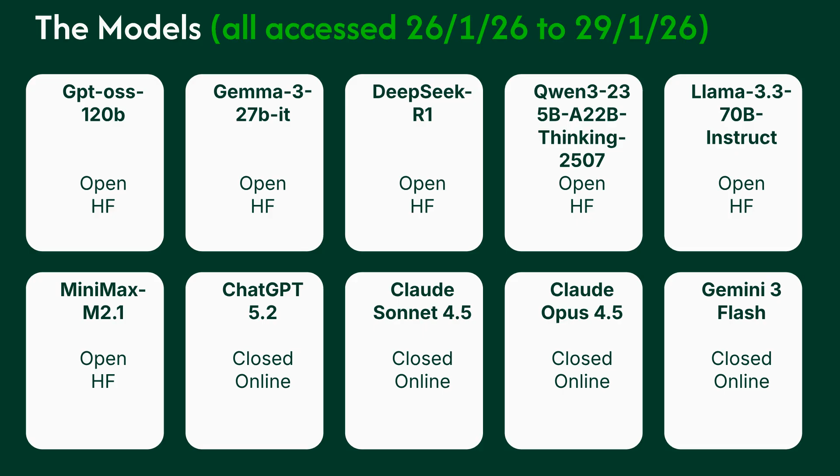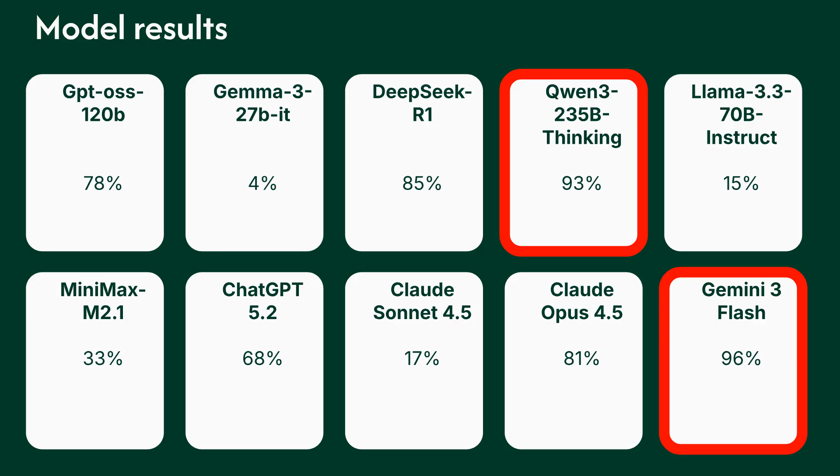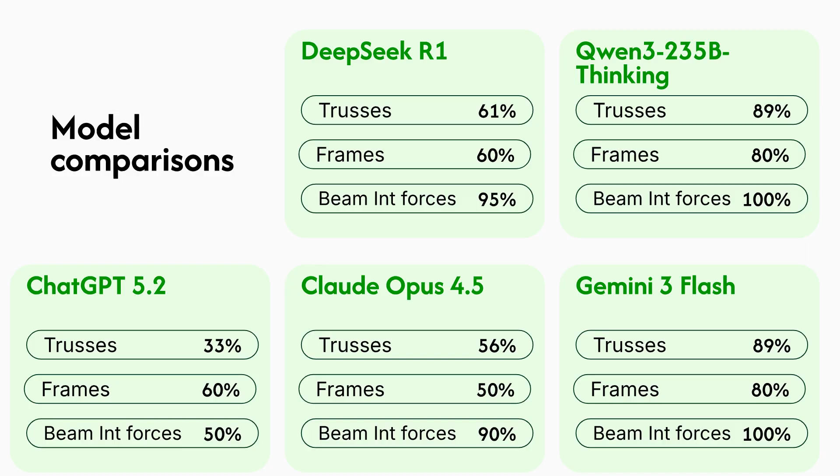Trusses, frames, and beam internal forces are the more difficult topics in engineering statics, due to the substantive calculating and reasoning required. Gemini 3 Flash and Qwen 3 Thinking performed strongly on these topics, with 80% or higher accuracy. Other models struggled in these difficult areas.

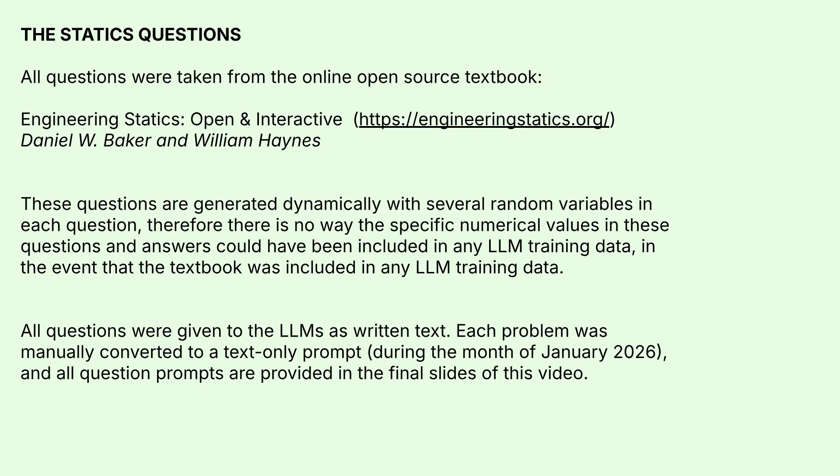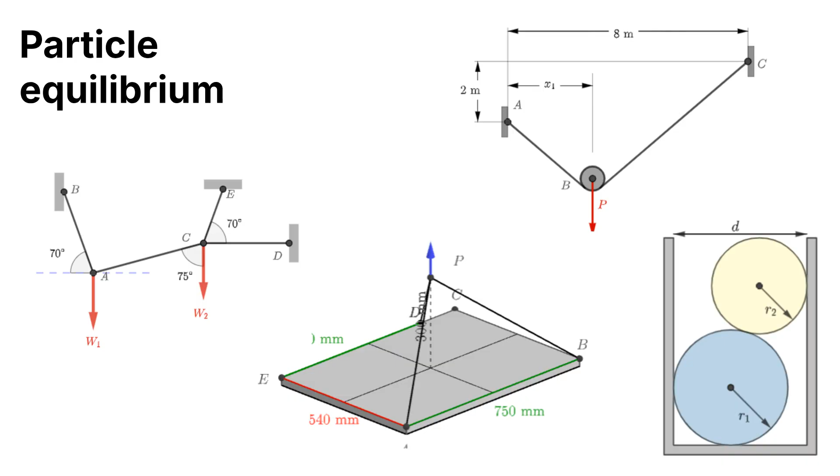All statics questions were sourced from the open-source textbook, Engineering Statics: Open and Interactive. Because the questions utilize dynamically generated variables, it is unlikely that the specific numerical values were included in any LLM training data. All questions were manually converted to text-only prompts. The following slides show some exemplar problems from the different topics. Note that the LLMs were prompted with the text-only version of the problems provided at the end of this video.

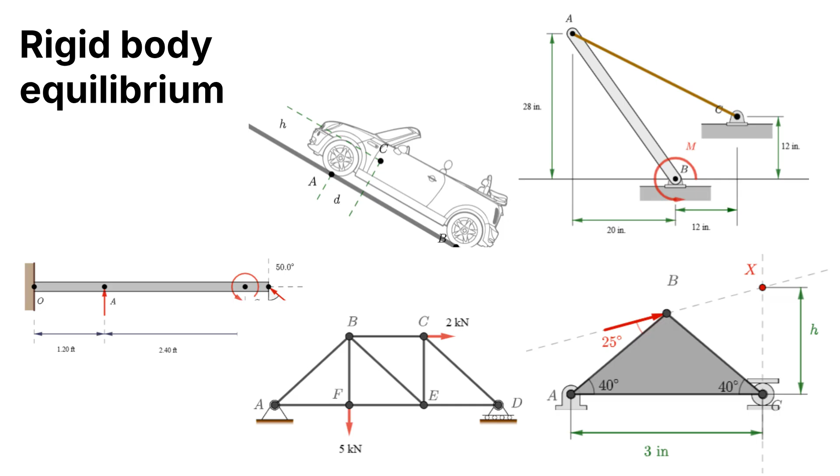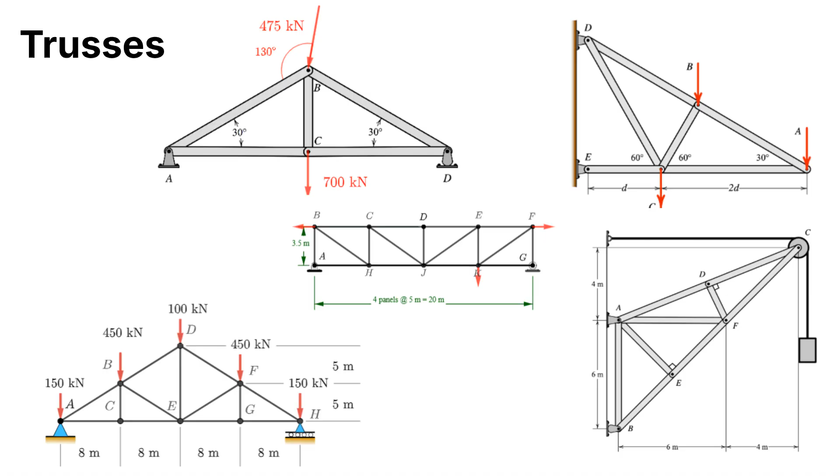Here are some particle equilibrium problems. The problem set also included problems involving moments and force couples. Rigid body equilibrium was another important topic covered in the questions. Truss problems were also included in the dataset, where either the method of joints or sections is required. These are challenging from a reasoning standpoint, since internal forces and their correct signs need to be carefully managed.

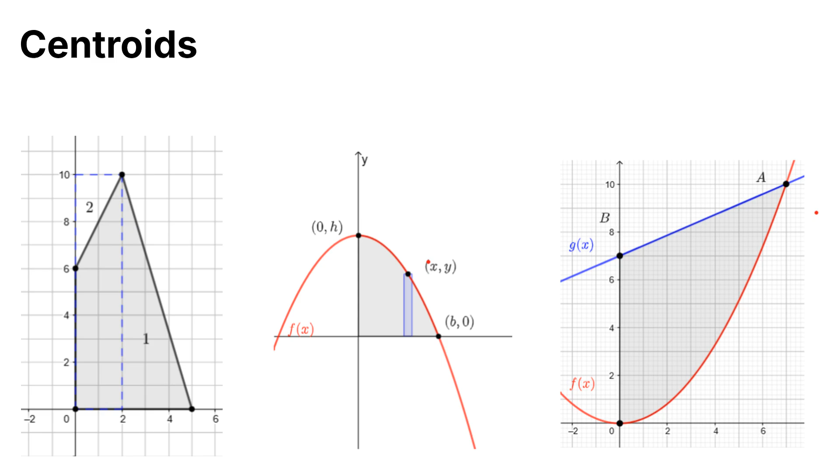The dataset contained various frames problems, some with multiple different types of loads. Questions on centroids were part of the problem set. Questions requiring the calculation of beam reaction forces were part of the problem set. Problems related to beam internal forces are also quite challenging. Some questions required the calculation of maximum or minimum values, while many required the calculation of the full shear and

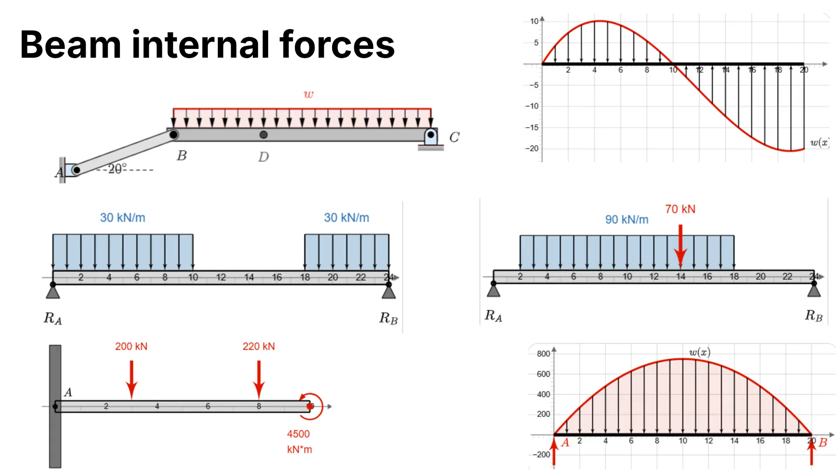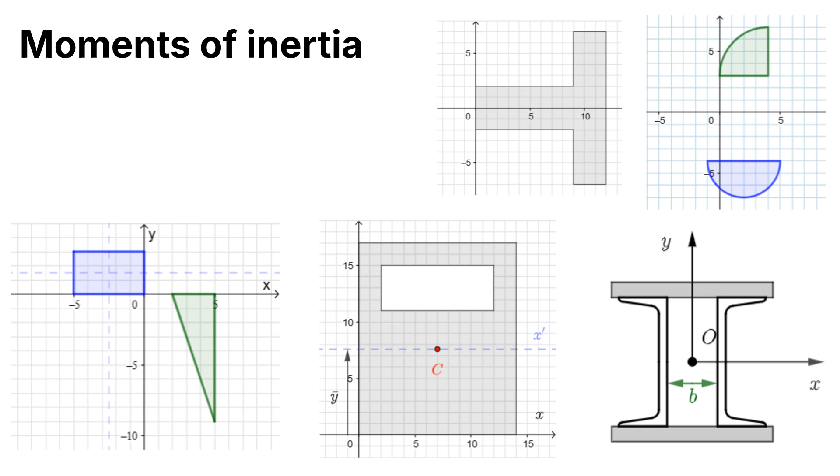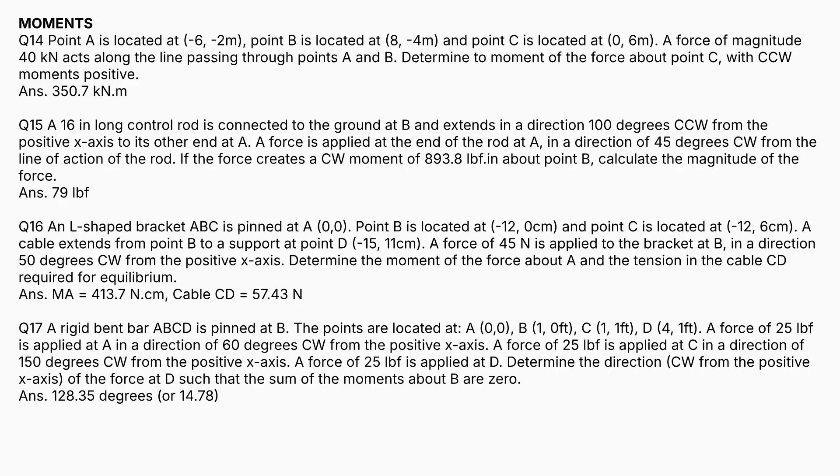bending moment diagrams. The dataset included several friction problems. Finally, some questions on moments of inertia were included. In summary, the full list of typical engineering statics topics was covered. The final slides provide the text prompts of the questions exactly as they were provided to the LLMs. The answers are also provided here for the viewer. Obviously, these were not given to the LLMs.

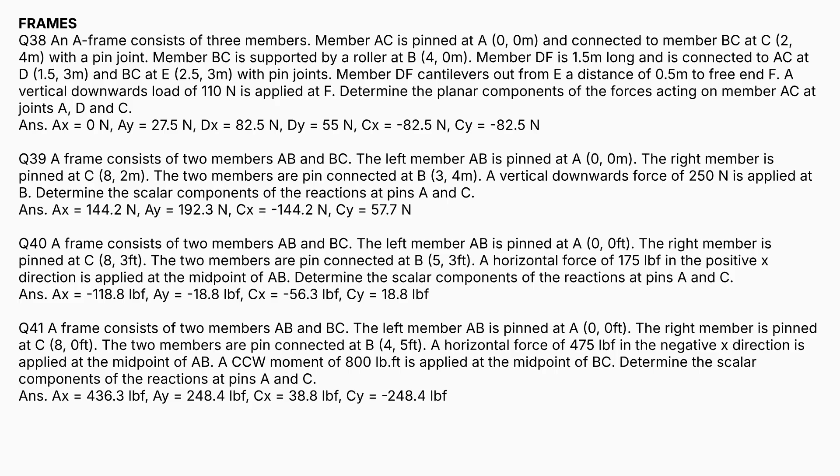There was also a system message provided to the LLMs defining sign conventions. Positive x-axis is right. Positive y-axis is up. Positive internal forces on an incremental element are shear force upwards on the left side of the element, shear force downwards on the right side of the element, moment clockwise on the left side of the element, moment counterclockwise on the right side of the element, and normal force outwards on both sides of the element. Also to use 4 significant figures.

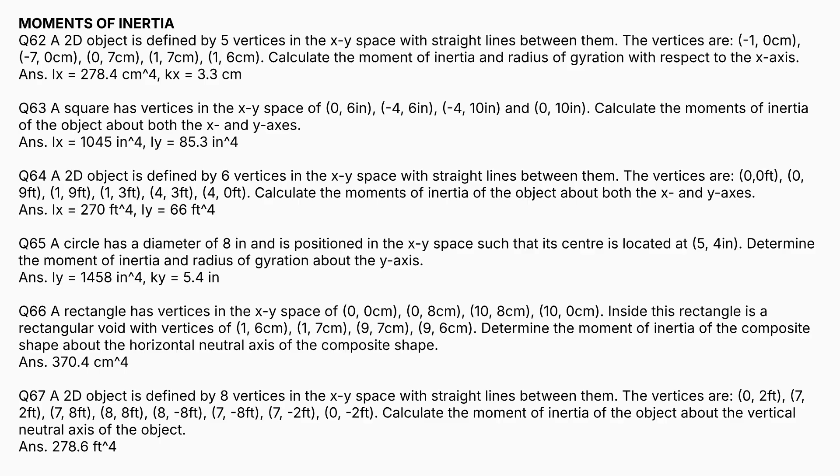I am currently working on the next installment, which will test how good LLMs are at engineering mechanics problems, so check back here soon.